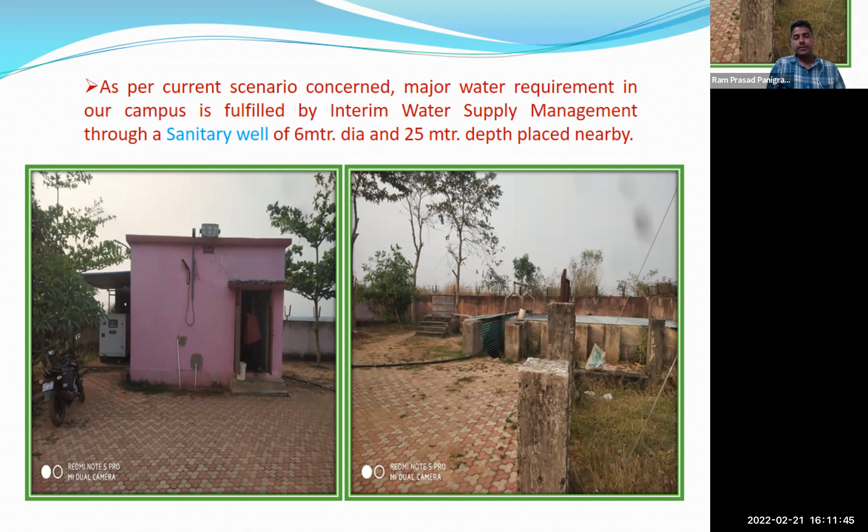Okay, this pumped groundwater from the sanitary well, we are treating first. Then that water is collected here at the waterworks near the math building side. This is located inside the campus only. All of you might have seen that one. That tank in front of the athletics building. Yes. So there it is channeled, and that water is collected there.

So there we have separate tanks. Their tank capacity is around 12.61 lakh liter. Okay. So out of which, for fire safety, that is most important, 4.28 lakh liter will be preserved for fire safety always. And the rest is for domestic purposes.

Again, that delivered water is channeled and collected in our meditation center, which is on an elevated hilltop. So there also we are designing different tanks that can hold 9.48 lakh liter of potable water. Okay, here separate tanks are built for different purposes. For AC functioning also, a separate tank is there. For domestic purpose also, separate tanks are there.

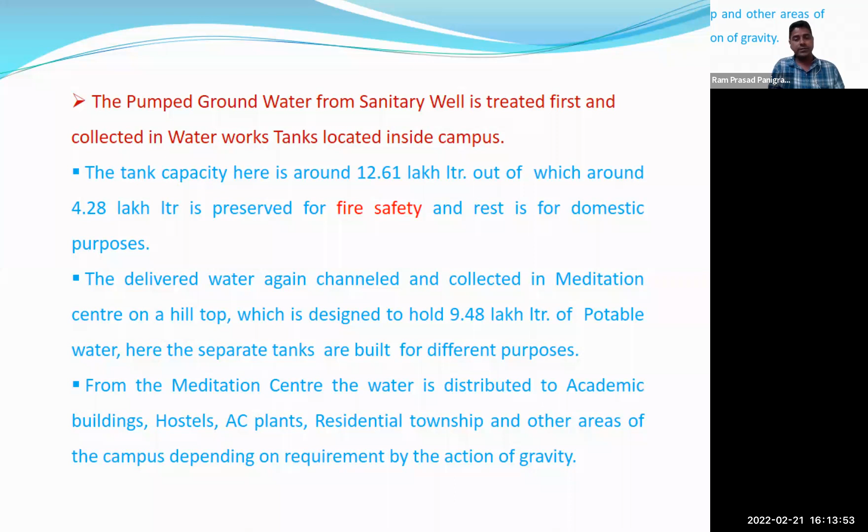So generally, this is the rooftop of that waterworks. Here different tanks are there. So here also the STP section is there, in a corner. From the STP, treated water is also coming there for irrigation, that is around 5,20,000 liter of STP water which is collected. There also a tank is there, and the remaining ones are for fire safety and domestic purposes. So then it is channeled through this, and it is going to the hilltop meditation center. So these are the different tanks.

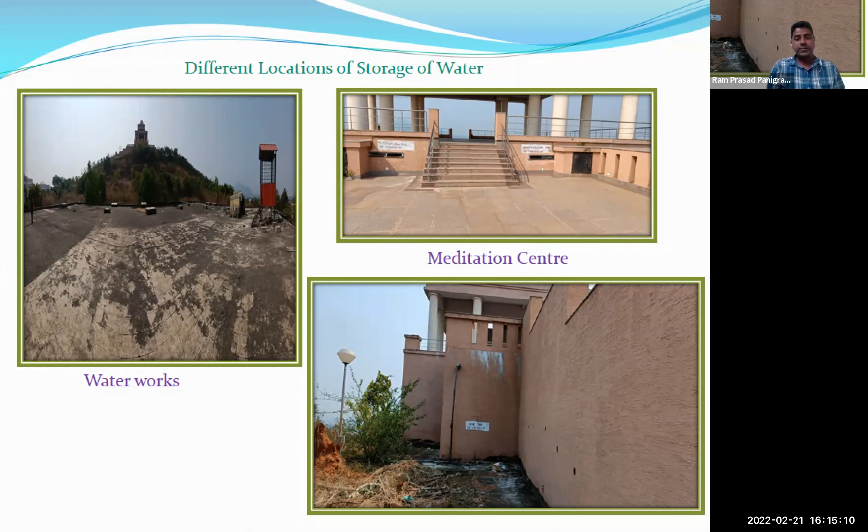I cannot see inside, but all of you might have seen this tank, the domestic one, and this is separated 1, 2, 3 like this, and this is for AC functioning tanks. These different tanks are there, separated.

In terms of our demand of potable water, it varies in different seasons. Mainly in the dry season, which has already started mid-January till the onset of monsoon, we need 10 to 11 lakh liters per day. In the rainy and winter seasons it decreases, and we need around 6 to 7 lakh liters per day. This includes the central air conditioning system, which mainly runs in our academic area, consuming around 1 lakh liters per day.

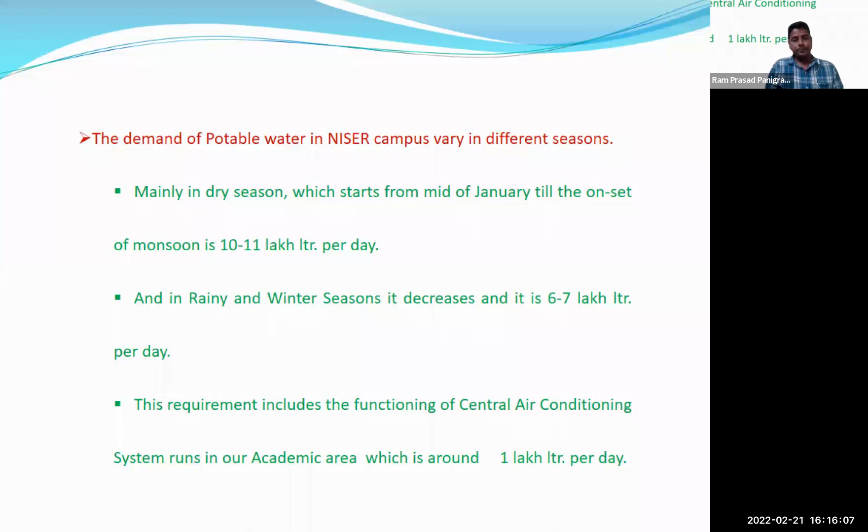For functioning of our internal water supply system, our institute works department is doing a very splendid job. Especially our engineers in the civil, electrical, and mechanical sections are putting in extreme effort 24/7 the whole year, along with our 6 plumbers, who are important for service and maintenance. On behalf of all, I thank them for their service rendered, so that we are living happily inside the campus, all the community.

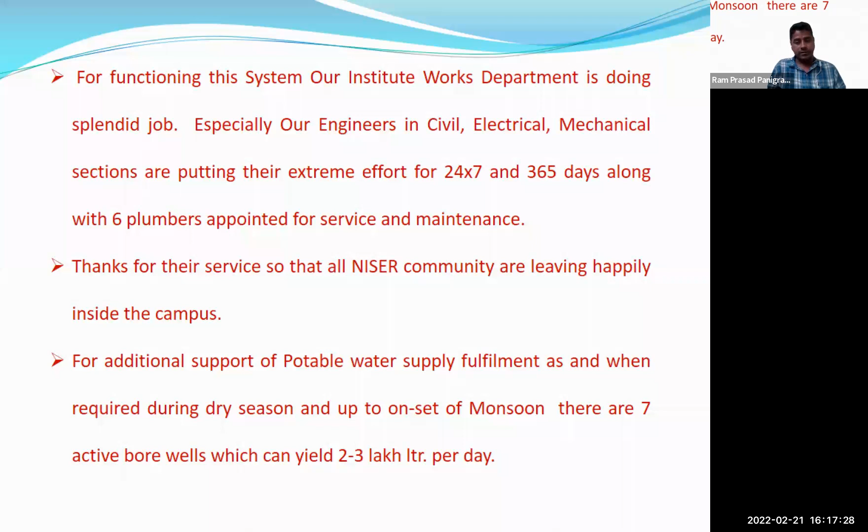For additional support, when in the dry season the water level of our sanitary wells goes down, we have bore wells. There are 7 active bore wells which can add 2 to 3 lakh liters per day. Throughout the campus there are 7 active bore wells, but we use them only when required, mainly during the dry season and up to monsoon.

And still, for additional need during tough times, in the month of April when it is very hot and up to monsoon, sometimes we need tankers. We buy from either the local authority or local vendors who supply. Per tanker it is 1,000 rupees, and generally we take 10 to 15 tankers per day.

Regarding electricity consumption and expenditure, for borewell and sump functioning over the 5 months we use them, it is approximately 1,25,000 units of electricity. Consumption at source, where we are pumping this water, is around 1,10,000 units. Then at the waterworks, two 15 kilowatt pumps are running 8 hours per day, which is around 90,000 units.

This expenditure in terms of rupees is around 19 to 20 lakhs per year. So we are spending 19 to 20 lakhs per year for potable water supply, for our complete management.

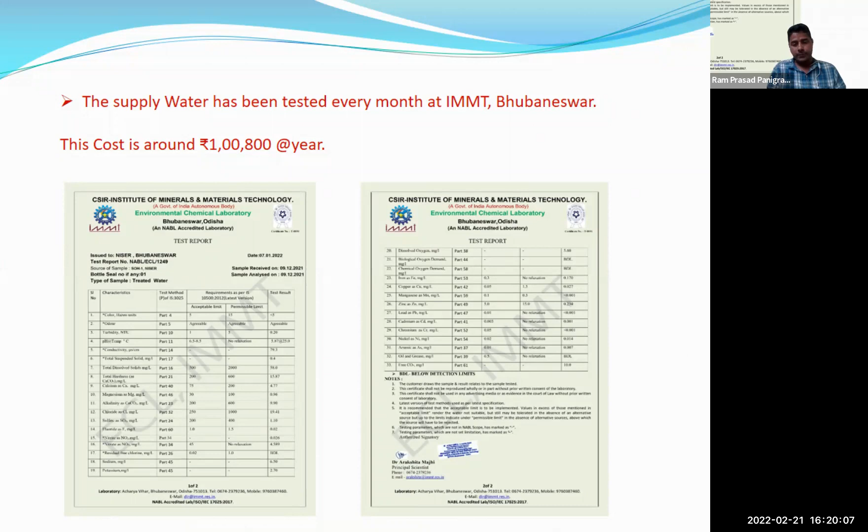Then we are also thinking about wastewater management. The generated wastewater is collected for treatment in the STP, and later we use it for irrigation. We have an 800 KLD capacity STP, and at its highest it has yielded 65 to 70% of that.

And for improving our groundwater level, on which we depend most, we are emphasizing rainwater harvesting. There are 2 big ponds. One is near the admin building with a capacity of 15 lakh liters, and the other is near the community center with a capacity of 13 lakh liters. There are also 6 recharging pits at different places for drain water inside the campus. I can show that.

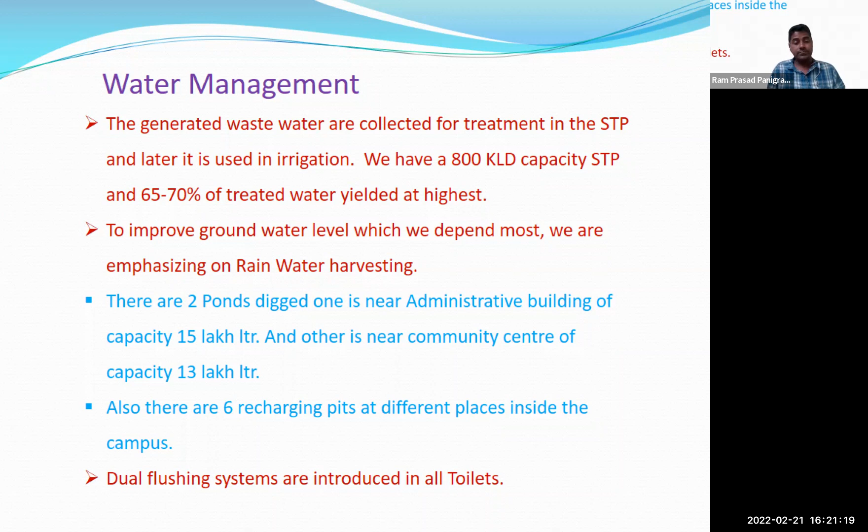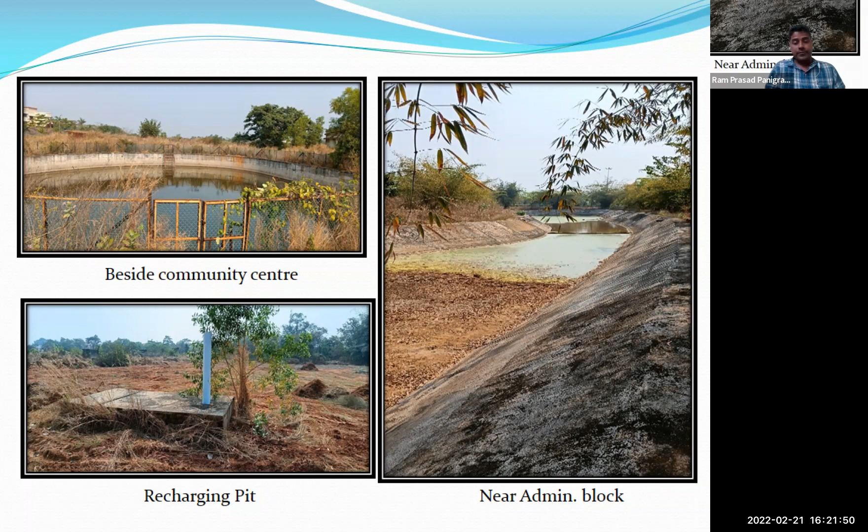So how will we improve this one? I just prepared some notes. So more recharging pits and ponds. One is a natural pond also there. I also talked with Subhagya sir. So there's a natural pond like this.

So we have to construct more and more ponds and recharging pits to hold the rainwater and to improve our groundwater level. We can help ourselves and the society nearby also. If the groundwater level nearby increases, that is helpful to us. So we should come up with some plans to use the rainwater that is collected in ponds. We don't have any plans for how to use those.

Actually, I just want to add to you, Ramprasad. Recently there was a meeting with DCSM, and it was decided at a high level, and even Director DCSM and Director NISER agreed to have a recharging pond, the way we have seen at our admin building now. One such natural water body you might have found near the community center. Yeah, the natural water body is there. That improvisation will be taken up.

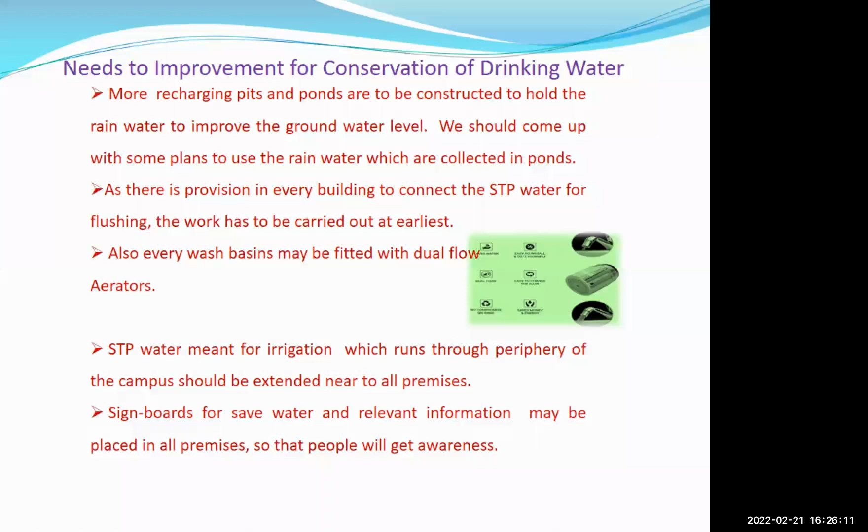Okay. Vinod, are you listening to the meeting? Kindly take a note of this. What Ram is telling, we will discuss in the IWC meeting tomorrow. In fact, this is a very important thing. I would request the entire IWD team to take this up. In the residential area also, a lot of people do gardening, including me. So if this water can be provided to all households, we can save a lot of potable water. So I think we should take this up seriously. Yes. Thank you so much for your interest.

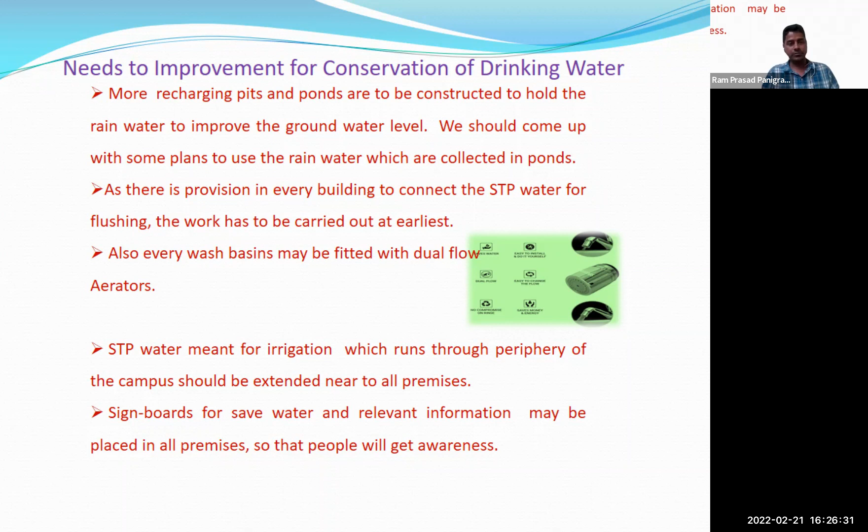So every premises should have signboards for saving water and relevant information, so that people will get awareness of what to do and what not to do, the do's and don'ts. It will be a great help.

In terms of shortcomings, the Naraj pipeline should be charged at the earliest, which could be done at the administrative level only, so that it will be an additional boost to us. The second thing is the water meters are not connected, mainly in our catering services in hostels. They are only paying a 750 per month flat rate, and the consumption is a bit more. So if water meters are fitted there and wherever necessary, it will be a good thing.